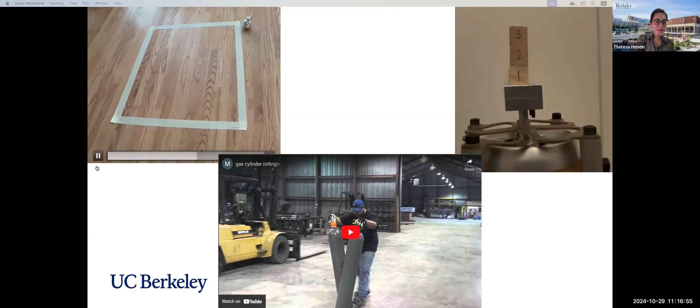So we're going to, in this presentation, we will, maybe I should mute this video. Stop 3. Stop 4.

Stop 5. Okay, so in this presentation, we will look at the effect of constraints on 3 systems: the first one, a sphere rolling in the plane, then a method of transporting cylindrical gas tanks, and then a planar version of forced motion of a stack of blocks. They're supposed to be shaking.

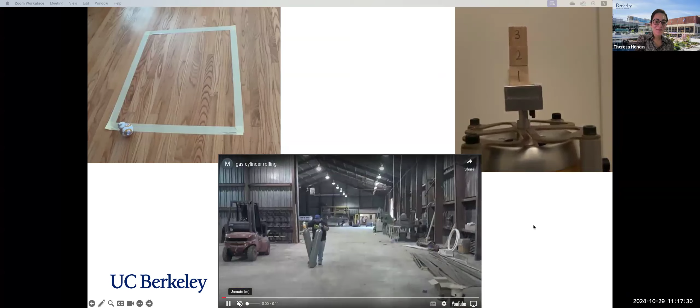Our first endeavor is to explore the holonomy of a rolling sphere. What is holonomy? The holonomy of a rolling sphere can be defined as the change in orientation of the sphere after it completes a rectangular path. This sphere starts with this orientation, and after returning to its original location, its orientation has changed. This phenomenon, where some properties of the rigid body return to their original state while others don't, is an illustration of holonomy, which is a consequence of the non-integrability of the constraints acting on the system.

Another interesting application of holonomy is parallel parking: you take the car from this configuration to the same configuration but in a different location. In this example, the sphere is tracing a rectangle.

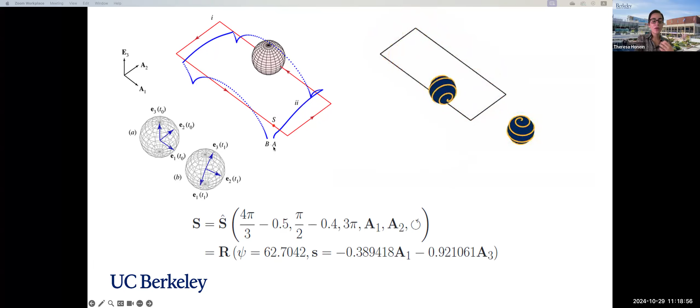We previously mentioned that holonomy can be observed by the change in orientation of the sphere as it traces the rectangle. But other ways to observe holonomy are to look at the co-rotational basis of the sphere at the beginning and end of the motion, which has changed. Also, if we follow a point on the sphere, its location changes from the beginning to the end of the motion.

The rectangle we're tracing has a starting point S, dimensions H2 and width W, and H1 is a parameter that locates the starting point.

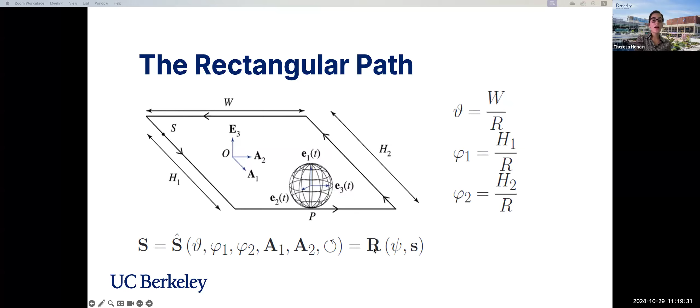We can find three angles by dividing these dimensions by the radius. This rectangular path is composed of 5 rotations that we can compose to find a total rotation R about an axis S with an angle psi.

There are cases where holonomy vanishes, meaning the sphere traces the rectangle and comes back to its original orientation. This happens when one of the two sides is a multiple of 2 pi, or if both of them are multiples of pi.

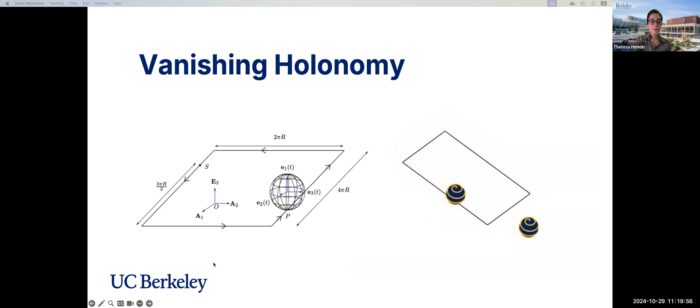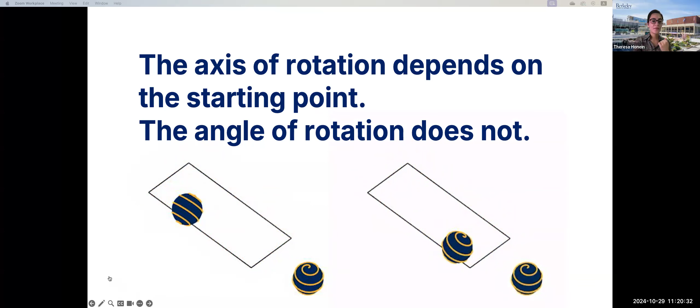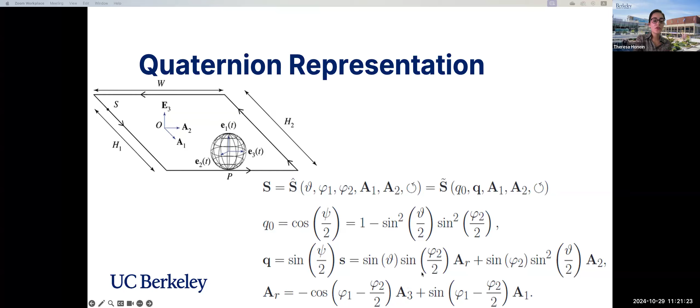From this representation of the total rotation, we can extract 2 special rectangles. What's special about them is that they have one of their sides a multiple of pi, which makes the rotation angle proportional to the other side.

These special rectangles we're going to use later on to formulate the Euler angle representation of rotations using rectangles in the plane.

So far, given a rectangle, we've traced it and figured out the rotation of the sphere undergone after tracing this rectangle. The question we now want to ask is: if we want the sphere rotated by a certain amount, how can we make a rectangle, or what are the dimensions of the rectangle, that when traced makes the sphere rotate by that amount?

We were able numerically to write an algorithm that, given a rotation—for example, here a rotation by an angle of 3 pi by 2 about this axis—gives us the dimensions of rectangles that once traced yield the desired rotation.

Notice that the rectangles are not unique, so you can trace several rectangles and obtain the same rotation. A numerical sweep over all possible orientations shows that we can probably obtain any rotation of the sphere by tracing one rectangle, except that this process involves numerical calculations. It's not straightforward; we cannot do it by hand.

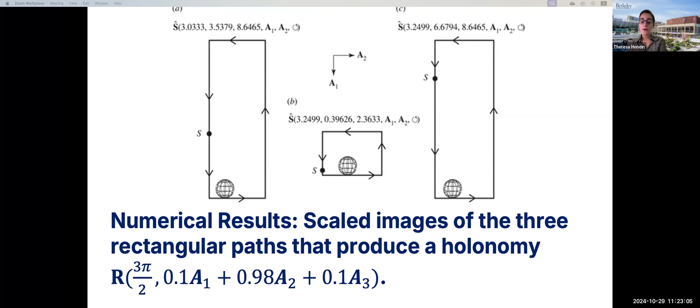So then we ask ourselves, can we obtain a simpler result, maybe using Euler angles? And the answer is yes. I'm not going to go into the detailed calculations, but using the special rectangles I pointed out in the previous slides...

We can devise 3 rectangles that, when traced consecutively, rotate us each by an Euler angle about another axis consecutively. In our paper, we provide the dimensions and orientations of these 3 rectangles, which you can trace sequentially to obtain the desired orientation, so you don't need any numerical calculations for that.

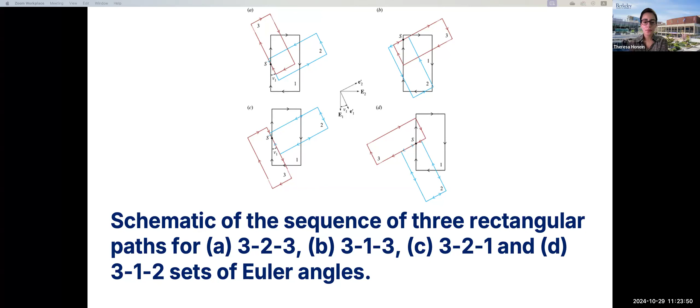That's an example of rotating the sphere by 3 Euler angles, mu1, mu2, mu3. This is the dimension and orientation of the first rectangle, and whether you should traverse it clockwise or counterclockwise, then the second rectangle and the third rectangle. That's a very nice interpretation of the Euler angles.

In conclusion, any holonomy can be achieved using a single rectangular path. The Euler angles can be visualized with the help of 3 rectangular paths. This work has applications to motion planning of spherical robots, such as BB-8 and Omni wheels.

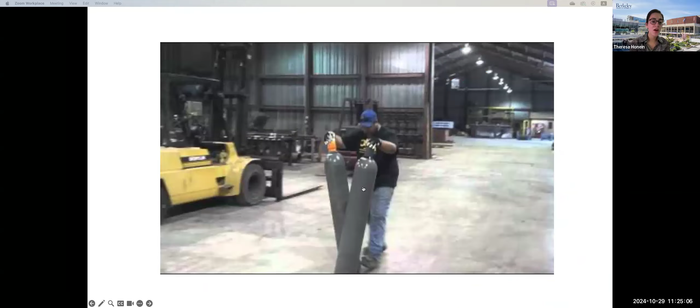The second topic we're going to discuss is the dynamics of transporting rolling cylinders. This topic was inspired by a video we saw on YouTube of a person carrying gas cylinders. I'm going to mute it and run it again.

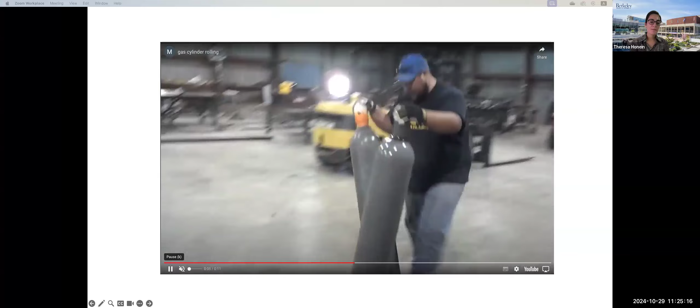This man is transporting the tanks by rolling them at opposite angles with the vertical. By propelling one of the tanks while maintaining point contact between them, both tanks can be transported together with their centers of mass moving in straight lines. We want to simulate this motion, and we want to look at the constraints applied to this system.

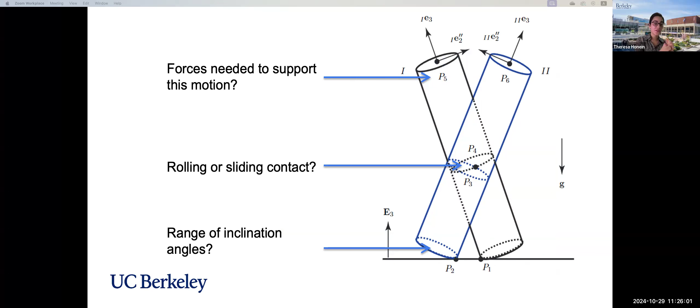Putting safety concerns aside, we are asking questions: is there rolling or sliding at the point of contact between the 2 cylinders? What are the range of feasible angles of inclination? And is it necessary to support the entire weight of both cylinders when transporting them?

Now, I started by assuming that there's rolling contact at these 3 interfaces. So these equations say that there's just rolling contact at these interfaces. Now the points P3 and P4 depend on all the coordinates of the 2 cylinders. That's the contact point between the 2 cylinders. So formulating that rolling constraint is a little bit mathematically kind of tedious.

But still we did it, and we applied Frobenius's integrability criteria to figure out if the system of constraints is integrable. And it turns out it's not integrable.

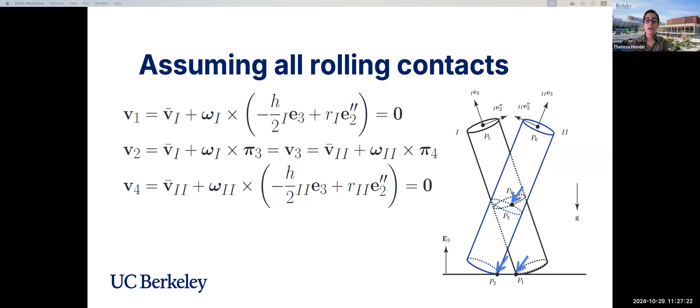And furthermore, it turns out that only 8 of these 9 constraints are linearly independent, meaning that if we want to simulate this motion, we will not get a unique solution. It's very difficult to simulate the motion of a system when the constraints are linearly dependent, because usually simulating the motion of a system involves inverting a matrix that contains the gradients of the constraints. So when the constraints are linearly dependent, the matrix becomes not invertible.

So then we thought that actually, practically speaking, the normal force between the two cylinders is going to be probably very small. So we thought that the contact between the two cylinders is probably going to be a sliding contact.

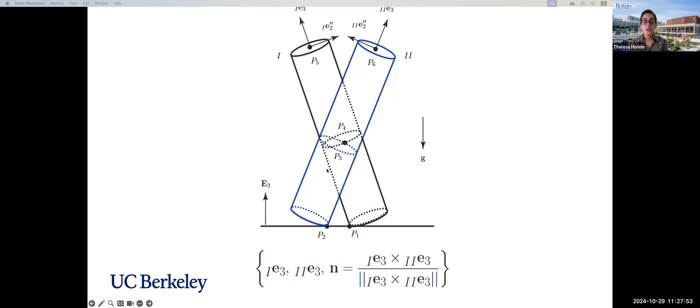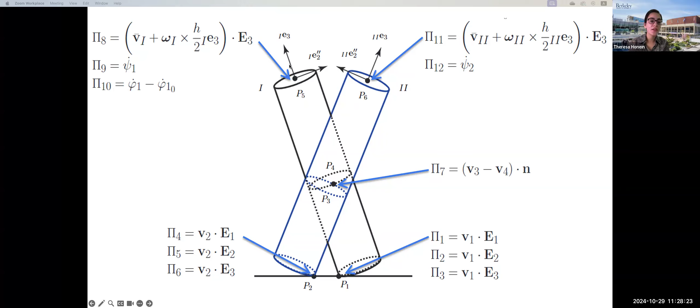So then we reformulated our set of constraints to just include a sliding contact between the two cylinders, rolling contacts between each cylinder and the ground, and then supporting the upper cylinders at a constant height, constant angles psi1 and psi2, meaning that they're just in the vertical plane, not inclined up, back or forth. And then we drive the first cylinder with a constant angular velocity about its axis.

And we are actually able to simulate this motion. I'm going to talk more about the method we use to simulate this motion in the next part of the presentation.

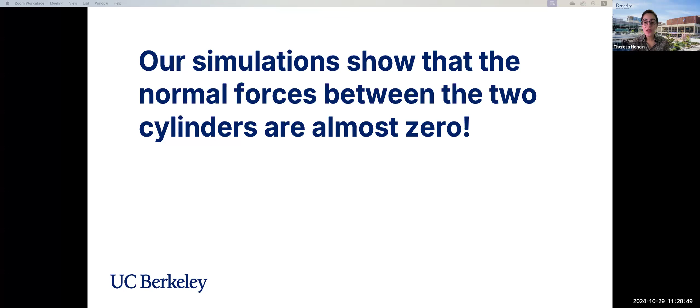Now, our simulations show that the normal forces between the two cylinders are almost zero, which agrees with our assumption. So as the normal forces between the two cylinders are negligible, the motion of the pair can be modeled as the motion of two independent cylinders.

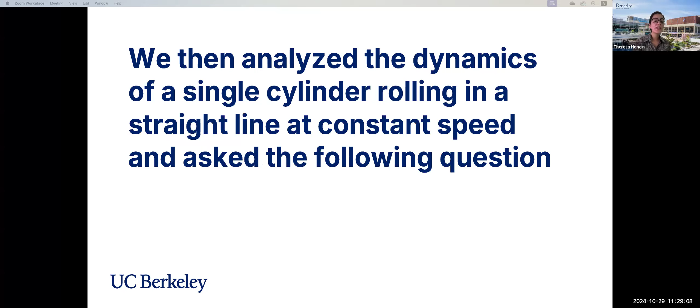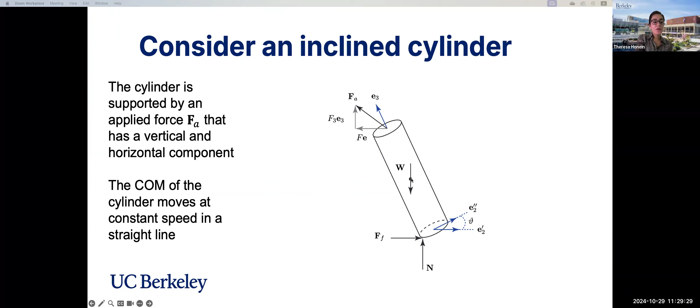So then we analyze the dynamics of a cylinder, a single cylinder, rolling in a straight line at a constant speed, and we ask the question, what is the optimum method of transporting one cylinder? Okay, so we will look at this one cylinder supported by a force Fa that has both horizontal and vertical components, and the center of mass of the cylinder moves at a constant speed in a straight line.

And if we increase the ratio R over H, the radius over the height of the cylinder, our envelope for possible configurations change. And if we increase our static friction coefficient, the envelope is gonna become bigger.

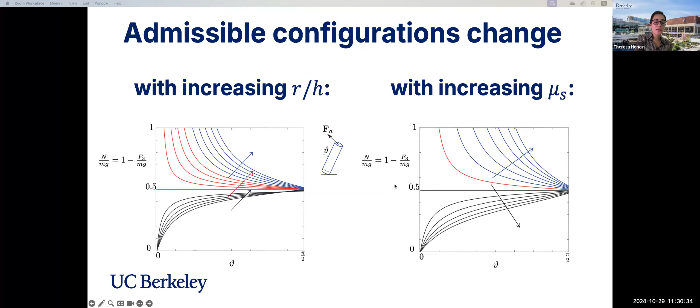Now, we can visualize the set of admissible configurations instead of in the theta and the normal force or the F3 force plane. We can visualize them in the F3 F plane, and here they're non-dimensionalized by the weight. And we can plot the static friction criteria in this plane as these red lines.

So then the forces, so then in this plane, the force Fa has components F3 and F that we can write as linear functions of each other in this way. And if we want to minimize the applied force Fa, we want to minimize the magnitude of this force.

In this graph, this is equivalent to minimizing the distance between the origin and these lines. And this happens in two cases, or actually three cases. The minimum point can be inside the boundary. For example, in the case of this line, the minimum, the point on the line that is closest to the origin is within the boundary of the static friction criterion. And the distance from the origin to the point on the line is perpendicular to the line.

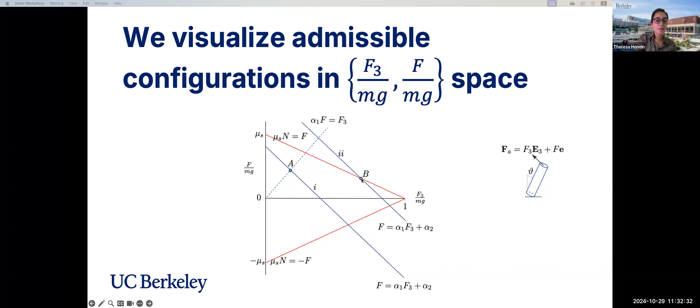So we can plot our results here. The red dots and the blue dots in the F3 over mg, F over mg space represent the minimum components of the applied force Fa. And we can plot the minimum applied force Fa. And you can notice that the minimum applied force Fa does not only have a vertical component F3, it also has a horizontal component. So friction actually helps you minimize the applied force.

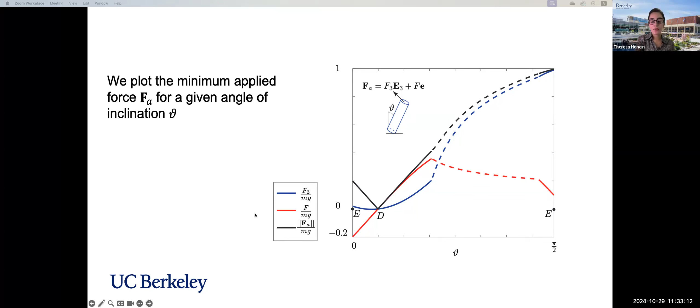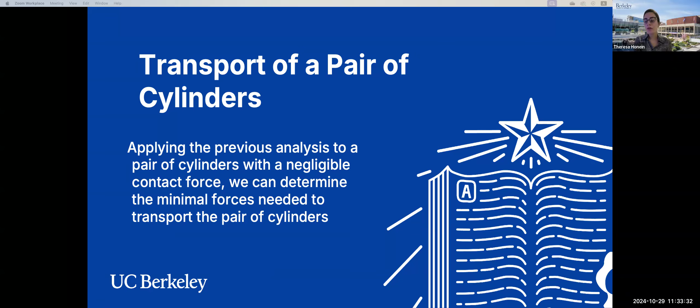So then, applying the previous analysis to a pair of cylinders with a negligible contact force, we can determine the minimum forces needed to transport a pair of cylinders. The minimum force needed to transport a pair of cylinders is just the minimum force needed to transport one cylinder, applied to each cylinder. And we can also verify our results numerically.

Since we're at it, we also talked about the holonomies of a rolling cylinder. The holonomy of a rolling cylinder can be defined as the change in orientation of the cylinder after it has returned to its original configuration.

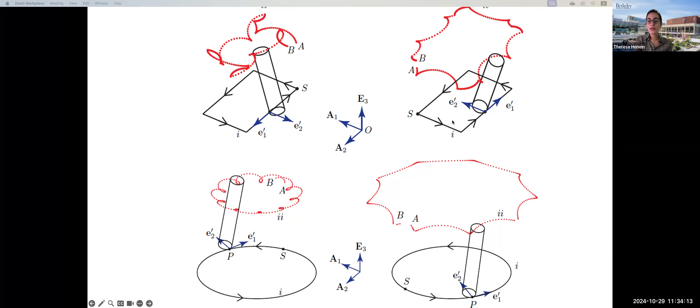The difference between the cylinder and the sphere is that the cylinder can either be inside or outside the region it's tracing, and this changes the holonomy of the cylinder, the change in angle. Mathematically, the difference between the two cases is that this vector e2 prime from the Euler basis we used to describe the orientation of the cylinder, in case A, points outside the shape being traced, whereas in case B, it points inside the shape being traced.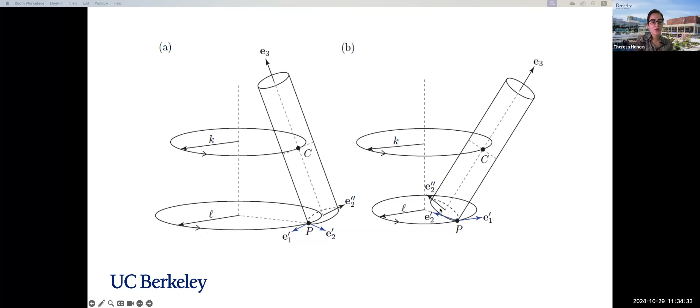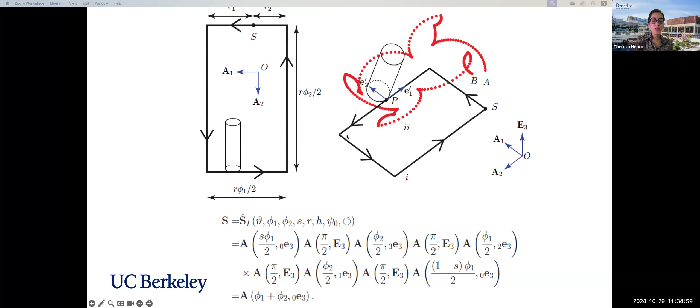And again, we can multiply the components of the rotations needed to trace these shapes to get the total rotation. So for the case of the rectangle, the total rotation is going to depend on the perimeter of the rectangle. That's also true for the case of the circle, or any shape. The holonomy of the cylinder is going to depend on the perimeter of the shape you're tracing.

So for a cylinder tracing a circle, the holonomy is going to be equal to C over R. The sign is going to be different depending on which case we're talking about, but the change in angle is going to be C over R, where C is the circumference of the circle being traced, and R is the radius of the cylinder.

This is kind of related to the problem—it's a popular brain teaser—of if you have two coins, and you want to rotate one coin about the other, how many rotations do you need to go back to your initial configuration?

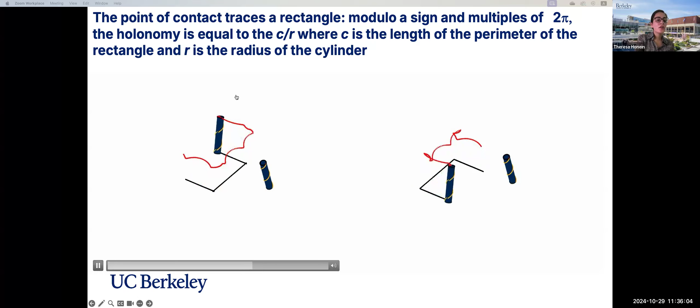Also, this is a figure of the holonomy of the cylinder tracing a rectangle. Here the holonomy is C over R, where C is the length of the perimeter of the rectangle.

Our last topic is about the dynamics of a collapsing set of blocks. Stacked objects are everywhere—for example, containers on a shipping vessel. There's a recent interest in robots stacking objects to build walls, or just stacking randomly shaped objects, and then people carrying objects.

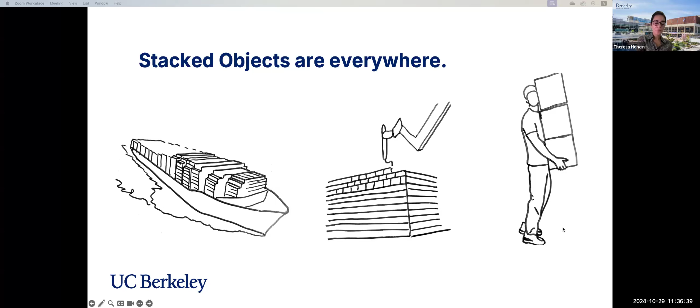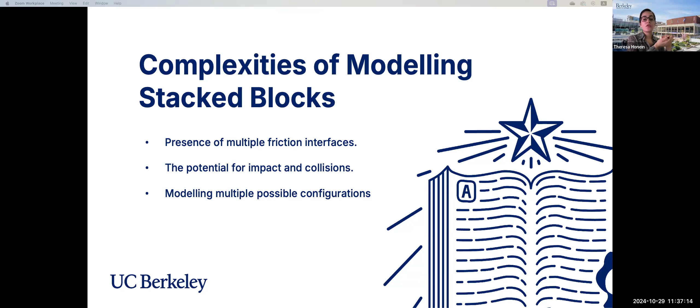Now, modeling stacked objects is very complex because there are multiple friction interfaces present between each block, and there's a potential for impact and collisions, meaning that the equations of motion become discontinuous because of impact. Two consecutive blocks can have different possible relative configurations with respect to each other, so when we define the contact between the blocks, we have to take into account all these possible contact configurations.

Now, to study the dynamics of a stack of blocks, recourse to numerical methods is necessary. Earlier works for a single block model the impact of the block with the ground plane using a single coefficient of restitution and integrate the equations of motion between impacts.

So what I'm saying is that there are earlier works that have tried to model the dynamics of one block on an oscillating base. There's basically been two ways to do it. Either they look at impact and model it using a restitution coefficient to relate pre-impact and post-impact velocities, and then between impacts, the equations of motion are smooth, so we can solve them.

The issue with this method is that it doesn't deal well with accumulation points. Accumulation points are when we have many impacts in a short period of time. For example, if you throw a bouncing ball on the ground, after some time there are going to be accumulation points, so many impacts in a very short time interval. If we're trying to resolve every impact, then it's just going to be impossible—there are going to be too many impacts.

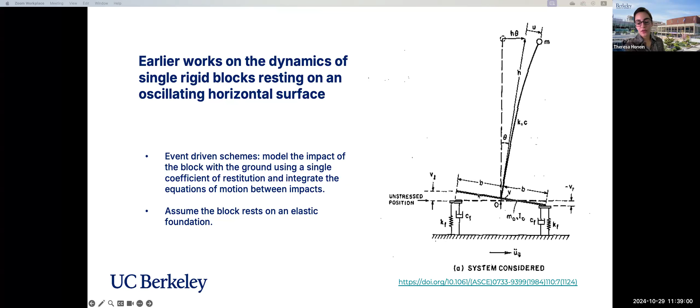The other set of methods to analyze a block on an oscillating foundation is, instead of having impacts, to assume that the block rests on an elastic foundation. Then the equations of motion are continuous, smooth, and integrable.

Now, these earlier works on the dynamics of a single rigid block resting on an oscillating horizontal surface show a range of complex dynamics, including sensitive dependence on initial conditions, bifurcations of periodic motions, and chaotic motions. As a result, one can anticipate a larger variety of complex dynamics for a system of stacked blocks.

Before I go into the stacked blocks, I want to talk about the numerical method that we're using to solve the equations of motion.

The numerical method we're going to use was published in a paper in 2021 by Capobianco et al., people in Germany who have been working on these methods for a long time. It's called a non-smooth generalized alpha method for mechanical systems with frictional contact.

This method is able to resolve non-smooth equations accurately without penetration of the bodies, and resolve friction, which is discontinuous. You can see in the figure that it also deals well with accumulation points. This is the bouncing ball, and the accumulation points are resolved at the end, with no penetration between the ball and the ground.

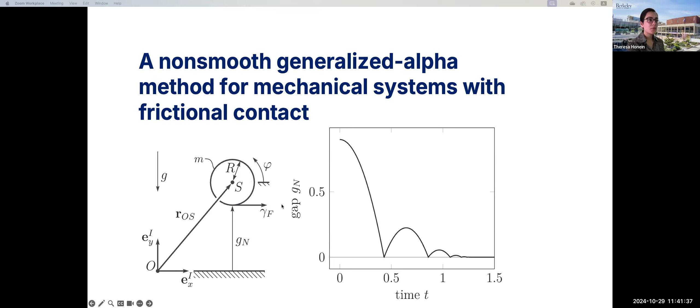To be able to simulate the motion of, for example, the sphere or the blocks, we need to formulate the gap distance constraints between the contacting surfaces. We also have to figure out the slip speeds between the contacting surfaces to be able to prescribe friction, to determine if friction is static or kinetic and prescribe it.

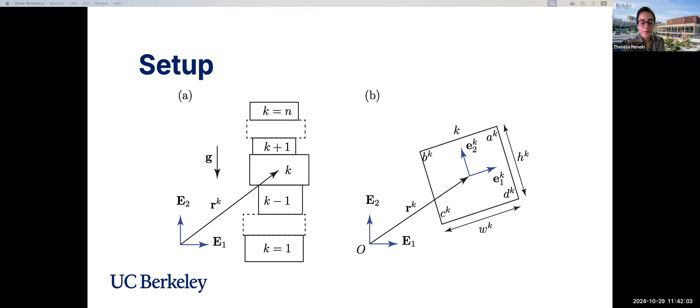I think I'm running out of time, so I'm going to try to hurry up a little bit.

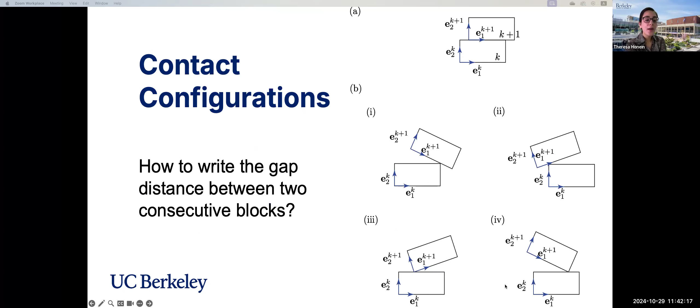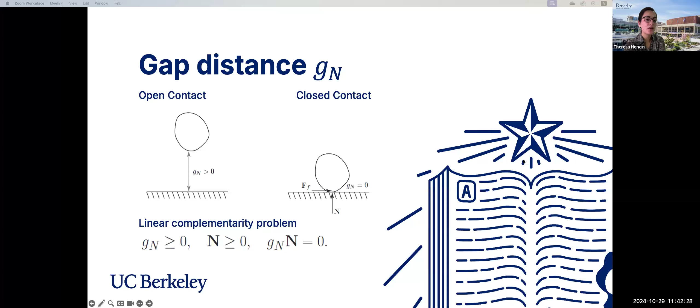There are different possible configurations of the stack of blocks. You can see 5 of them here. We need to formulate the gap distance for each case, and it ends up happening that it's much easier to formulate 2 gap distances for each contact instead of 1, which is kind of different than what we had for the sphere.

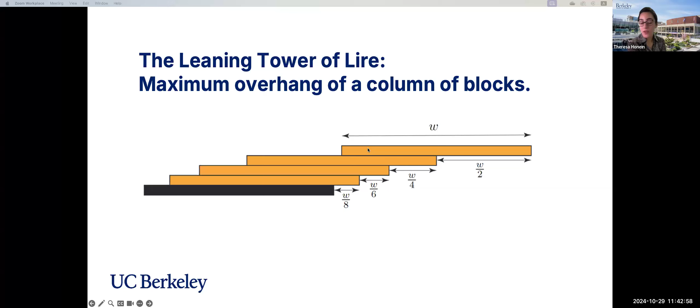We applied our work to 3 systems of stacked blocks. The leaning tower of Lire is the first one. It asks what is the maximum overhang of a stack of blocks like this. We are able to replicate this configuration in our code and get the correct normal forces acting on the stack. If we displace the bottom block just by a teeny tiny bit, 1% rightwards, the stack is going to fall.

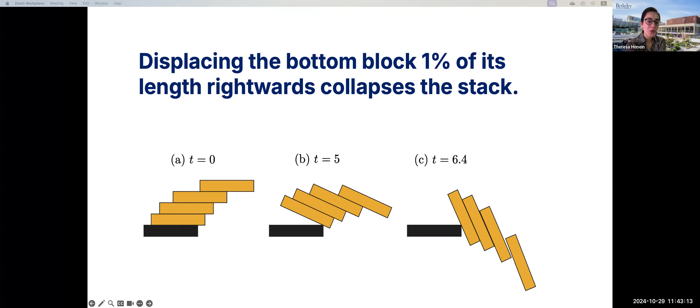I'm going to show you the simulations in a bit, but for now I'm going to show time-lapse figures. After the leaning tower of Lire, which we used to verify our simulation, we considered the column of blocks on an oscillating base.

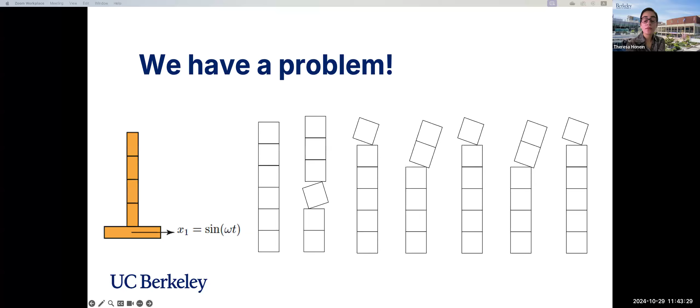But we had a problem: the iterations would not converge. This happens because when the code is solving for the motion of the stack, it's not only solving for the motion, but also for the configuration of the stack. And the configuration depends on the motion, and the motion depends on the configuration.

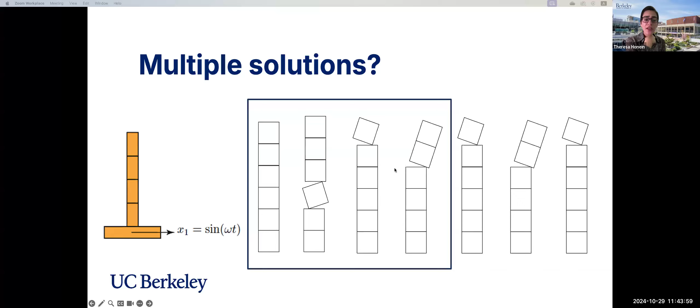What would happen is that the code would settle on a configuration and calculate the motion, then the configuration would change, and the motion would change again, and it would go back and forth like this. That's why convergence wasn't happening.

So we introduced a small algorithm that circumnavigates this problem. What it does is gather the unique configurations that the code is going through. We fix the contact configuration, then solve for the motion, and see if the motion is feasible for this fixed contact configuration.

What we end up getting is that there are many possible solutions. For example, for one stack of blocks whose base is oscillating, after 3 periods we have several solutions, 13 in this case. We can see how one solution divides into many solutions. This is due to the sensitivity of this system to initial conditions and to numerical errors.

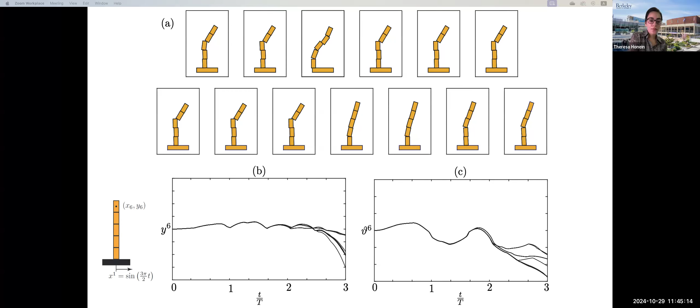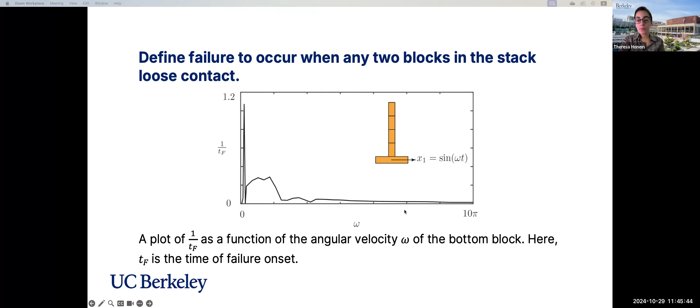Now, first we define time to fail: the first time at which any 2 blocks lose contact. If we plot that as a function of the angular frequency of the oscillation of the bottom block, we see that at lower frequencies the block is less stable, and at higher frequencies the block is more stable, which conforms with the observations from one block.

The next experiments we do are about sliding the bottom block. We expect that if the velocity of the bottom block is small enough when we slide it, all the stack is gonna move with the bottom block. If we increase the velocity a little bit, the stack is gonna slide and rotate on the edge of the bottom block. And if we move the stack fast enough, nothing's gonna happen.

Like the magic trick of if you had a piece of cloth, a tablecloth, and you were to slide it very quick, everything's gonna return back to its initial configuration. So we did these simulations, and we actually got results that conform with our intuition.

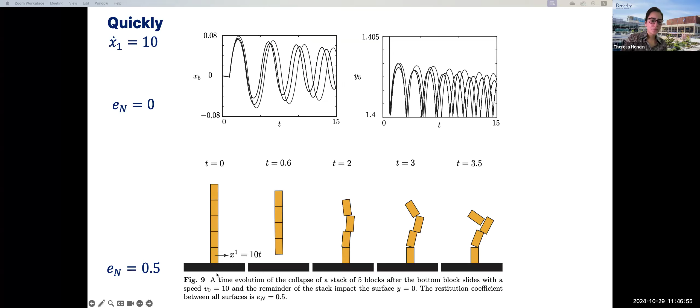We also played with the restitution coefficient. For all the previous simulations, the restitution coefficient was 0. But if we increase the restitution coefficient a little bit, a stack that would have previously been stable will collapse, and it will collapse more quickly if it was collapsing initially.

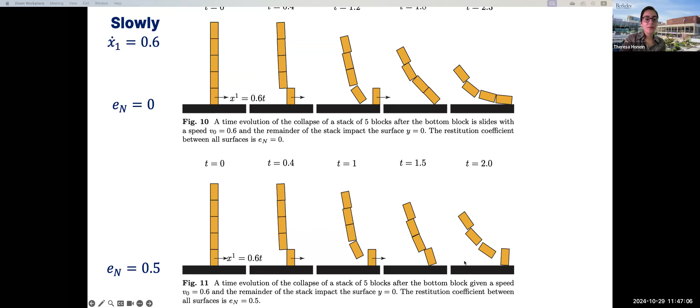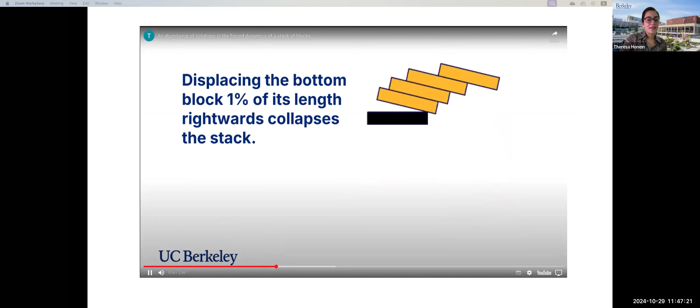Let me show you these simulations here. So that's the leaning tower of Lire that is gonna fall if we move the bottom block a little bit. So that's not a very stable system.

Okay, and let me show you the multiple solutions. So these are all the same system, the same initial conditions with the same excitation.

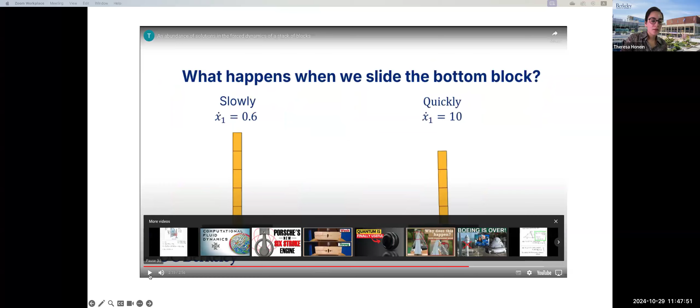And lastly, I'm going to show you the experiments of sliding the bottom block. Maybe I'll rewind a little bit. So that's sliding the bottom block quickly, but increasing the restitution coefficient.

In conclusion, our results agree with our intuition, and we can deduce something about just carrying a stack of blocks from these simulations, which is that once an instability has set in, we are not able to solve for the motion post that instability. So it's very hard, basically impossible to stabilize the stack once an instability has set in.

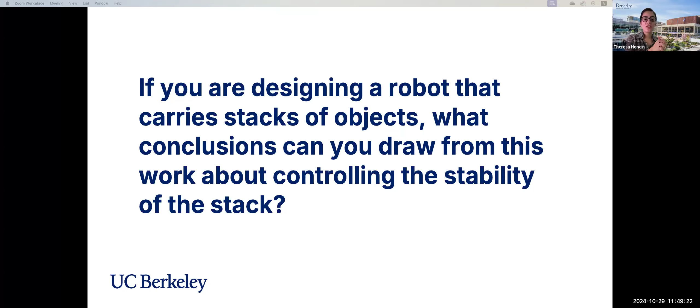Because if you want to stabilize it, you want to know what's going to happen to it, and based on that prediction, maybe control how you're holding a stack. But if you can't predict the future, then you cannot prevent it. That's why a lot of the robots that carry objects usually carry one object at a time instead of many.